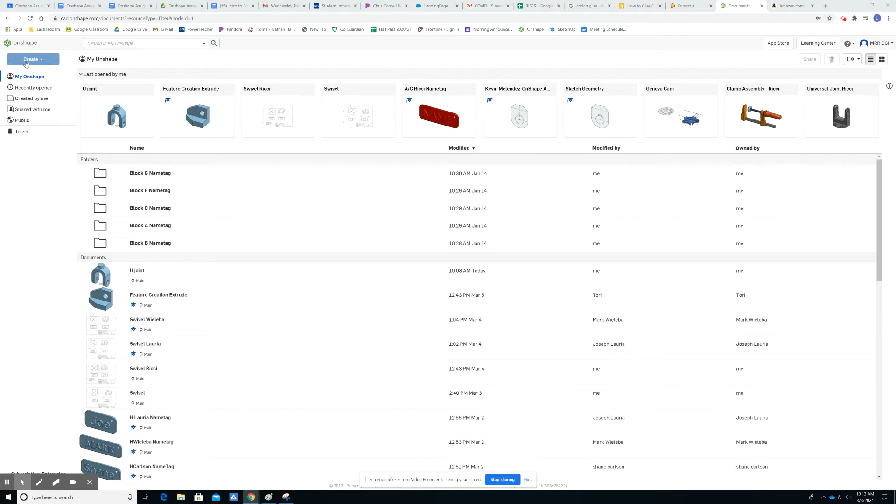All right, welcome to part 2 of the U-joint Onshape design drawing. We're going to start drawing the U-joint today. So I'm going to start a new document. I'm going to call this U-joint with my last name.

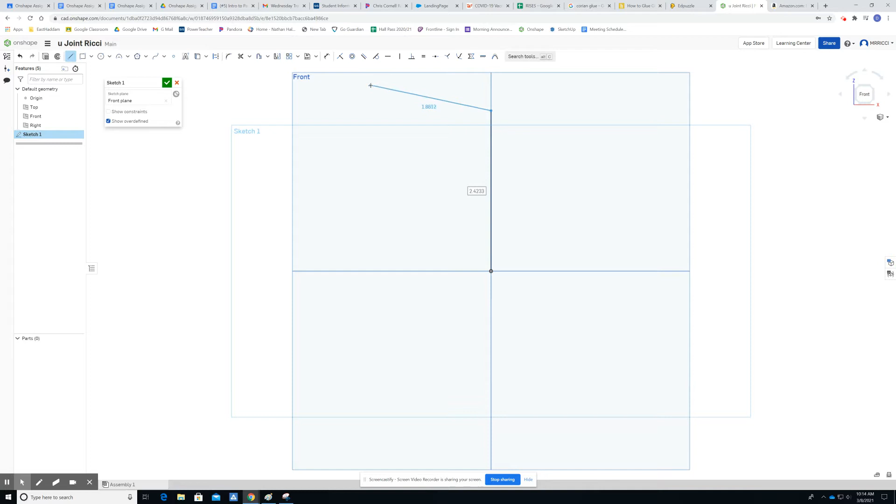I want to start normal to the front plane. I'm going to start a sketch. Sketch plane is going to be the front. I'm going to start by putting a construction line in the center off my origin. So I'm going to select the line, turn it into a construction line. And now I'm going to do offset lines.

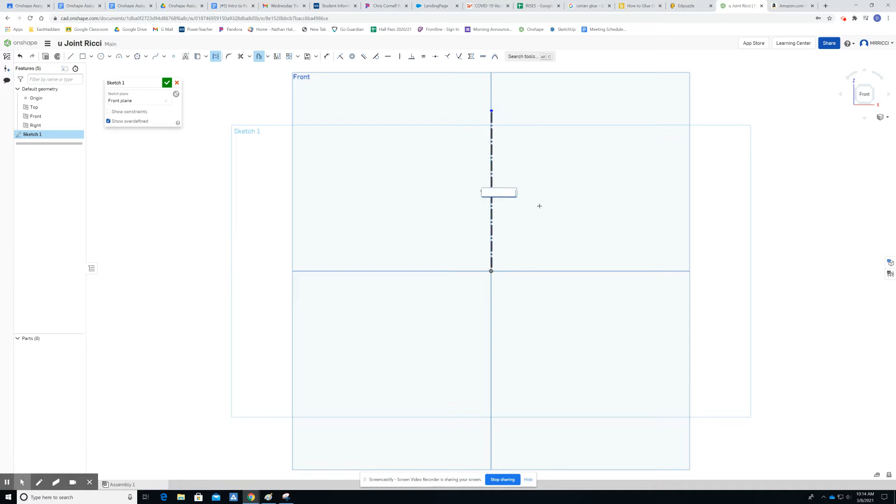So the U-joint has 3/4 of an inch of space in between it, as you can see here. Actually, it's not dimensioned. So we know that the radius on this is 0.375. So from the center to the edge is 0.375. So we're going to go that distance on each side. Let's mirror offset 0.375. I'm going to go the opposite direction as well. So click the arrow to go opposite side. 0.375. I want those both to be object lines.

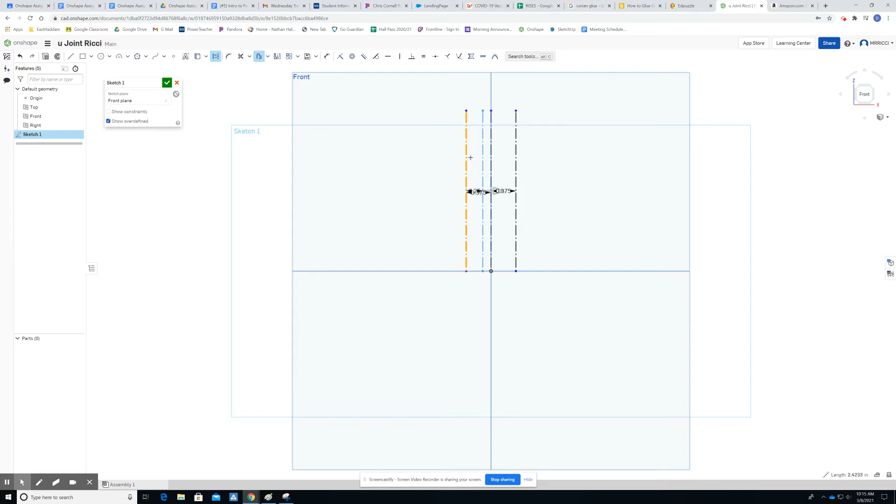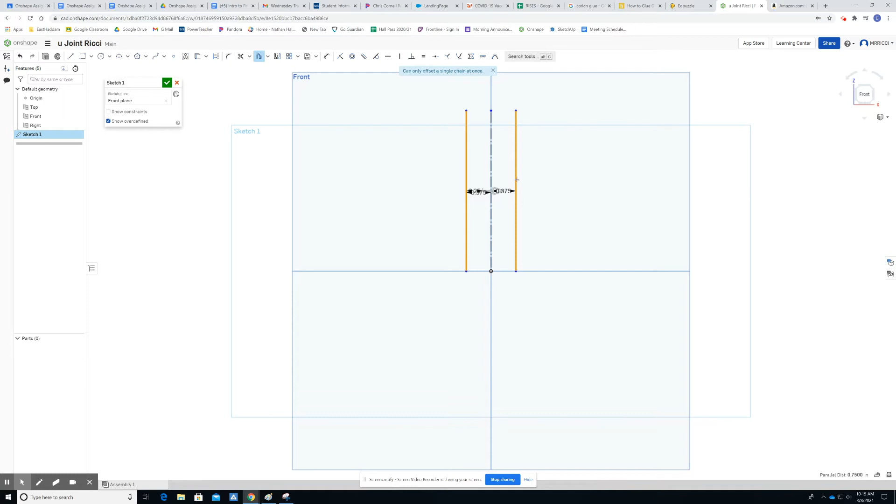All right, then looking back at our shape here, our U shape, it's actually an N shape this way, huh? So we want to go 1/4 inch to the left and the right of those two. So again, offsetting. Default value works here. So just hitting enter. All right, now I'm going to draw a line to cap off the bottom.

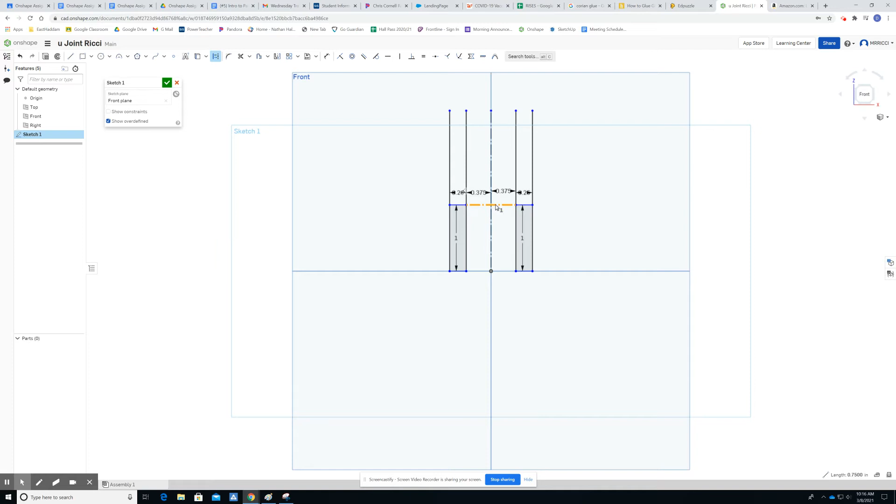Looking back at our dimensions, we have 1 inch until we put our radiuses on here. So I'm going to do an offset for that as well. Inverse the direction. Here. Inverse direction. Check. I'm going to put in another construction line between here and here. And I'm going to put a half circle centered on this construction line to the inside and to the outside. Midpoint.

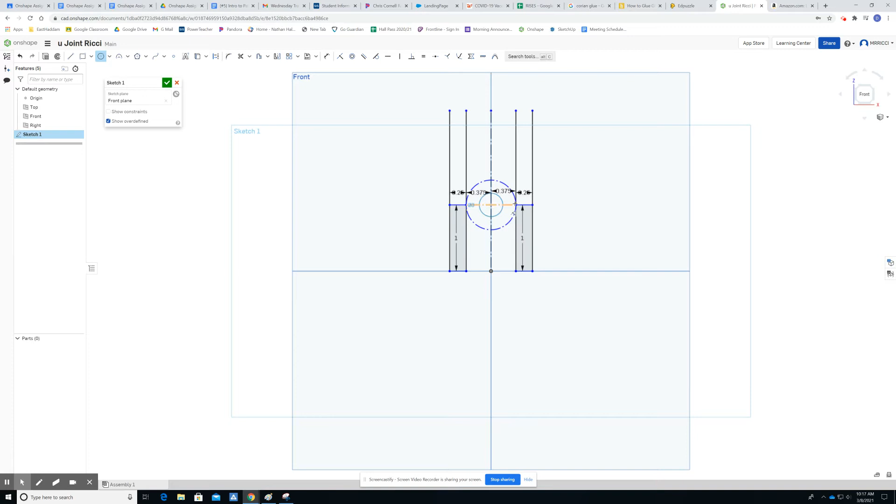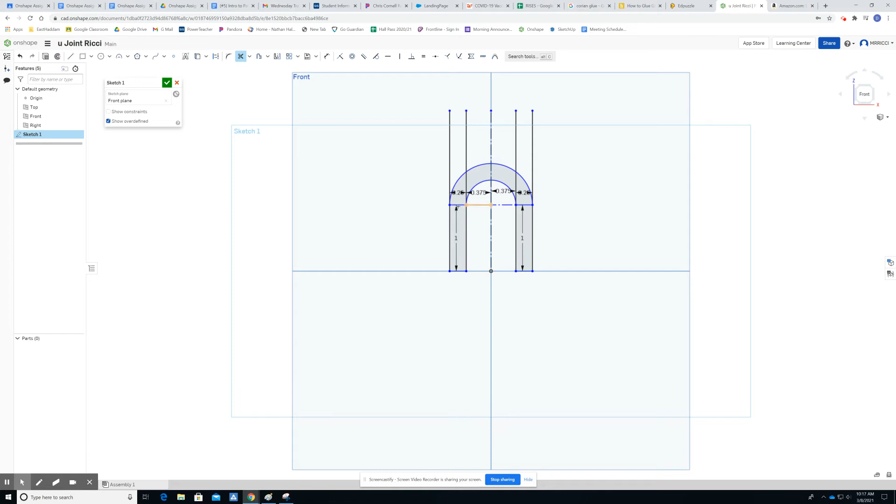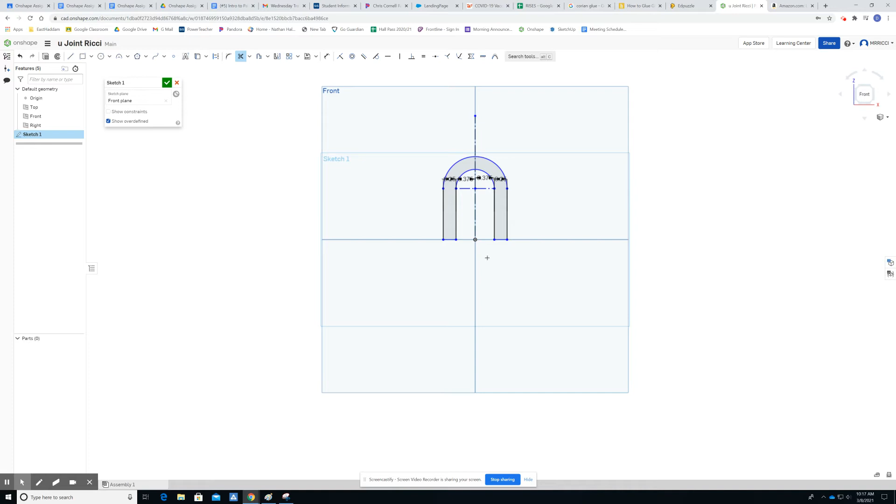Alright, so now I'll turn this back into an object line. We'll go through here and trim what I don't need. So getting rid of all these items. All right, so you want to dimension that for your sketch 1 so I can see the 4 dimensions that are shown on the assignment. Make sure you have all 4 dimensions there. And then we're going to move on to the extrude.

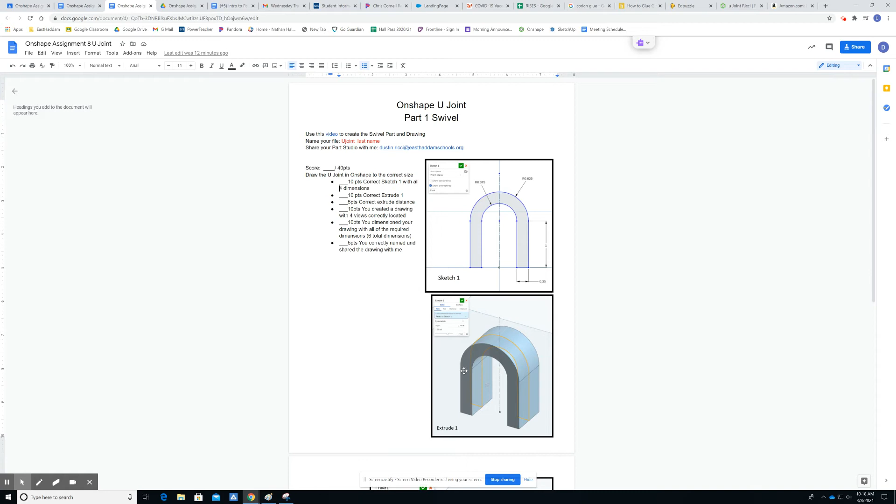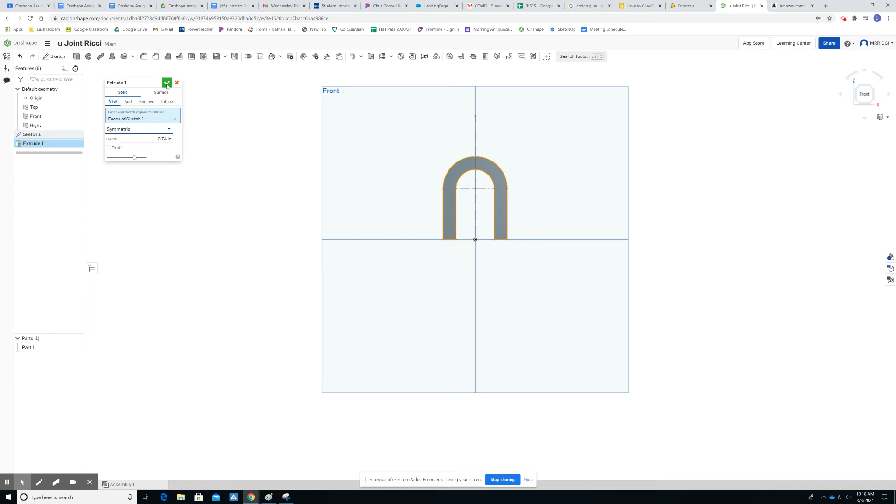Okay, if you look at the extrude down here, we're using our sketch as the midplane of the extrude, which is symmetric, and we're going out 0.74. So it's going to be half of 0.74 in each direction. So going back to the drawing here, we're going to say OK to the sketch. We're going to extrude 0.74, symmetric, and our sketch is highlighted. And we're going to be a new extrude. I say okay to that. If I put this in our isometric, we can see that we extruded that out.

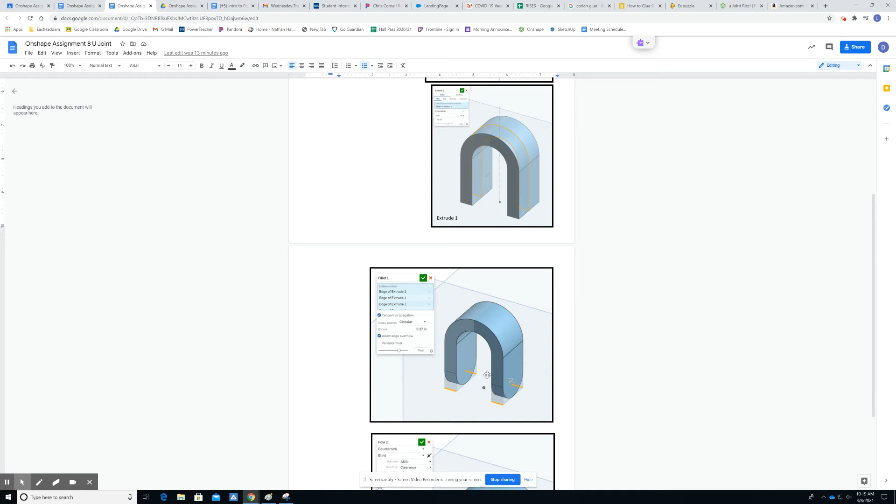All right. Next step from here is the fillet. Okay, so looking back again at the assignment, we're going to put 4 fillets on here to make the bottom part of this U-joint into a half circle. So 0.37 is our fillet radius. That's half of 0.74. Okay. Back in here, I'm doing a solid fillet. Entities to fillet. 1, 2. I'm going to rotate around. 3, 4.

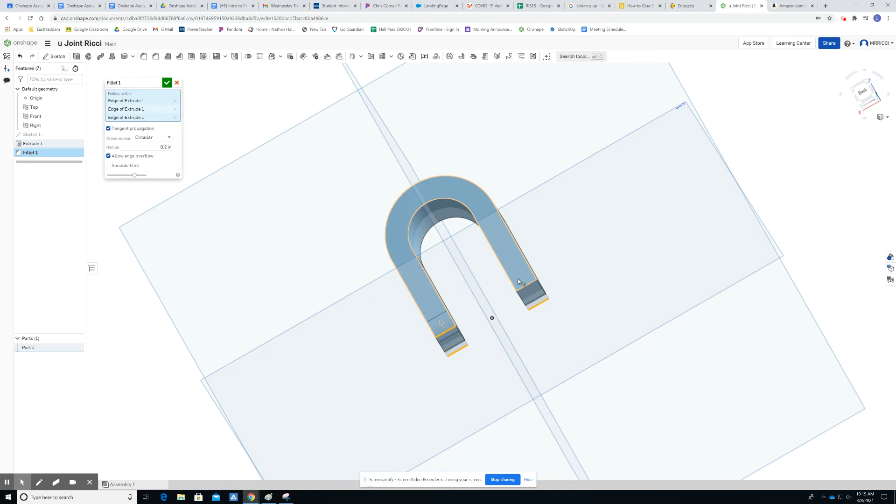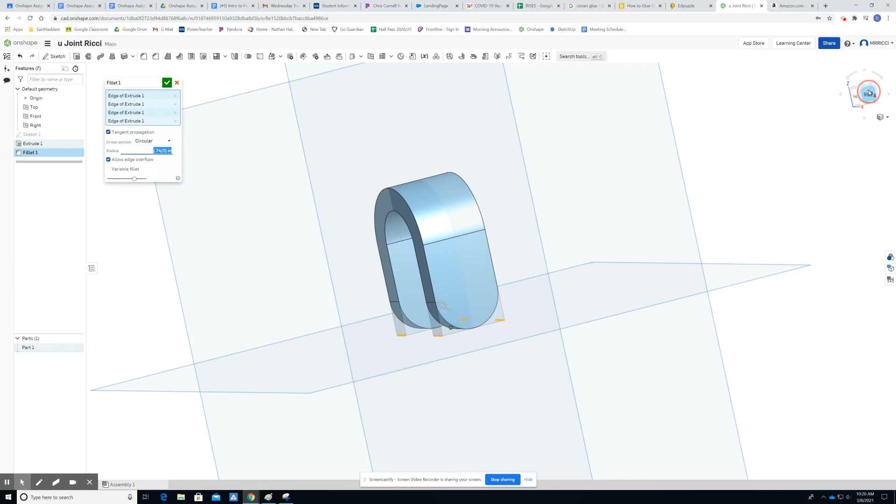Okay, as you can see, it's not doing quite a full half circle here because our radius is showing at 0.2. If we want this to be a perfect half circle, we know that we extruded at 0.74, so we can enter that value, but we're going to divide that by 2. So the software will do the math for you if you hit enter. And as you can see here, it keeps the equation in there, but it is doing the correct fillet size for us. Okay, say okay to that.

All right, the final thing that we want to do for this step of the process is we need to put 2 countersunk holes. So centered on our radius here, we want to have a countersunk hole in both of the faces. So going again back to our assignment, you see that there is a wide countersink for a flat machine screw, and then a diameter here, which is for a number 8 screw. Okay, so we're going to do a blind countersunk hole with the ANSI, American National Standards Institute, number 8 size. And it is a free fit hole. And here's all the specifics of the size and the taper of the countersink.

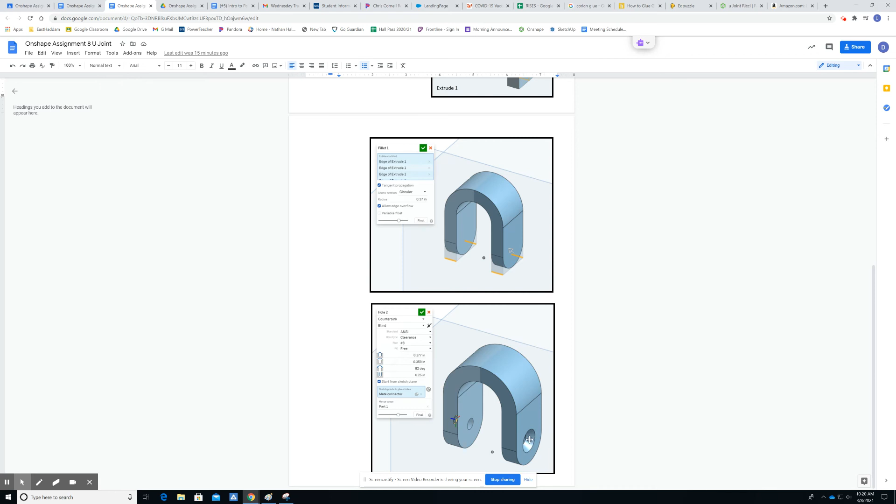All right, so to do that, we're going to go back to our U-joint. And just select our hole here. I already have all this populated because I drew this before starting this tutorial. But what you'll most likely see is through hole and simple when you open this for the first time. So I'm going to select the down arrow and go countersunk. Counterbored is not what we're looking for. There's a difference between countersunk and counterbored.

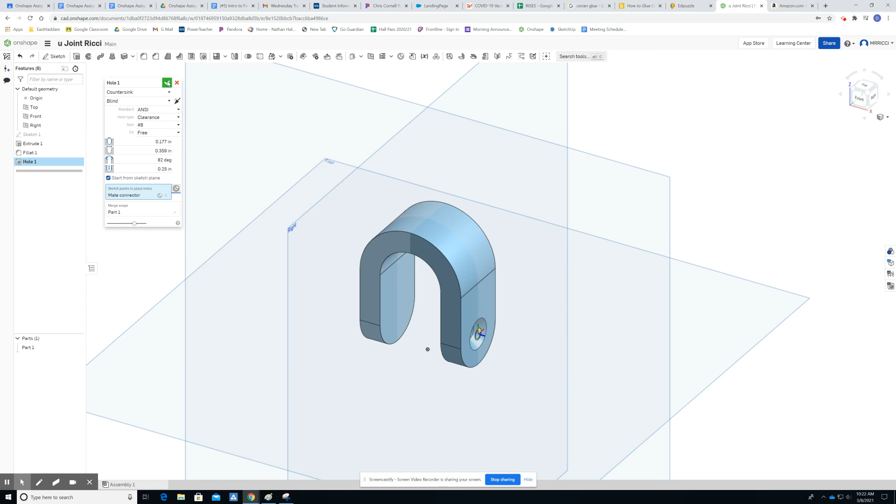So countersink, we're doing a blind hole, which is going to go just through one surface. We're going to go through here and make sure we're selecting ANSI. Clearance hole, size number 8, free fit. And then we need to mark our place where this is going. So I'm going to grab my mate connector and mate the center of the arc. Say okay. And so now we can see that we have a countersunk hole for that face. You're going to do the same process for hole number 2 in the opposite face.

All right, once this is done, share this document with me and share the Onshape document with me as well through the process that we've learned already.

All right, we'll pick up next time. We're going to do a hex size hole in here for a nut, sorry. And then we're going to put our shaft on here for connecting this to, if this were a real mechanical feature, we'd connect it to a drive shaft or a differential or something. So we'll have a shaft on here as well. All right, part number 2 of the U-joint is complete after that.